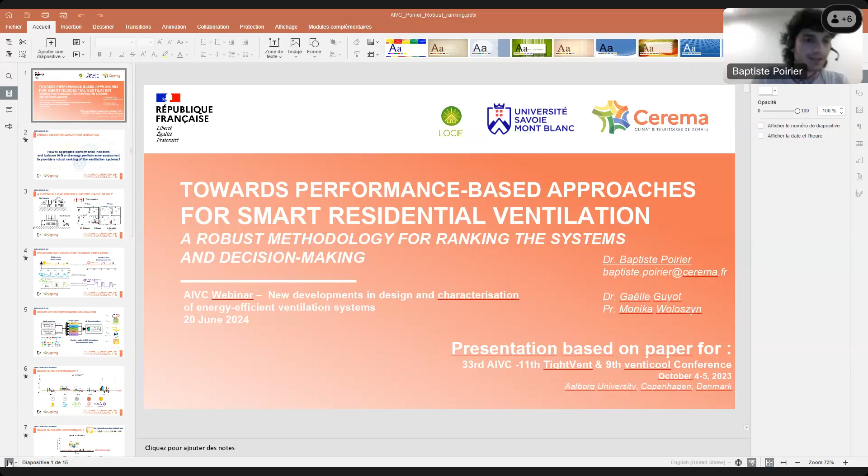So I'm Baptiste Poirier from Cerema in France, and I was a PhD student, and I did my PhD in LOCIE in Université Savoie-Mont-Blanc in Chambéry, and the work I will present today is based on a paper I presented at the last AIVC conference and also on my PhD work. We had a performance-based approach for smart ventilation, and today I will focus on ranking and methods for ranking the performance of the systems.

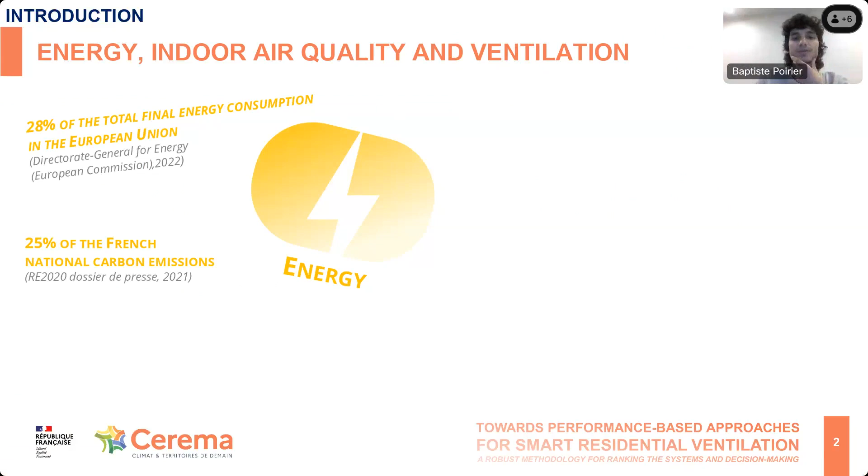A little bit of context on energy, building and ventilation. The building sector is part of total energy consumption in Europe, and in the French context it is part of carbon emissions. On the other side, ventilation and indoor air quality in buildings is important, as we spend between 60 to 90% of our time in buildings, and it has a cost for health because of bad indoor air quality.

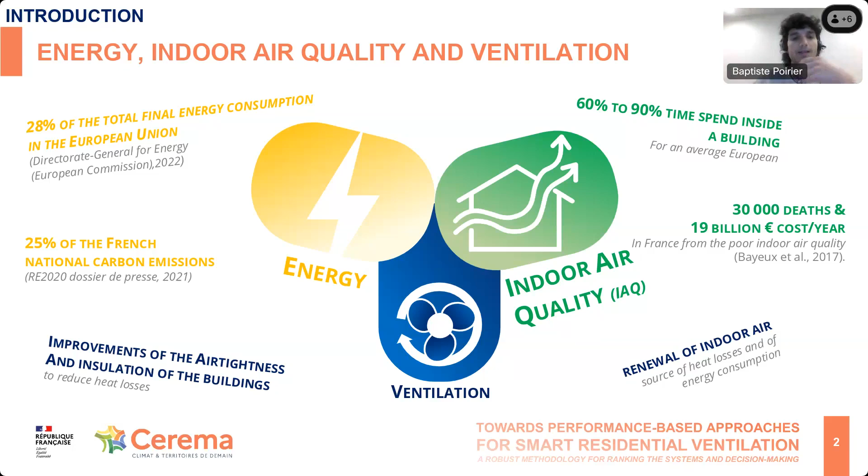So ventilation is at the cross section of energy and IAQ aspects in buildings, but today with reducing heat loss and increasing airtightness of buildings, there is a need for air renewal, and that raises the question how to keep good indoor air quality without increasing the amount of energy lost due to ventilation. And the question today was how to aggregate performance indicators and balance IAQ and energy performance for assessment, and to provide a robust ranking of ventilation systems.

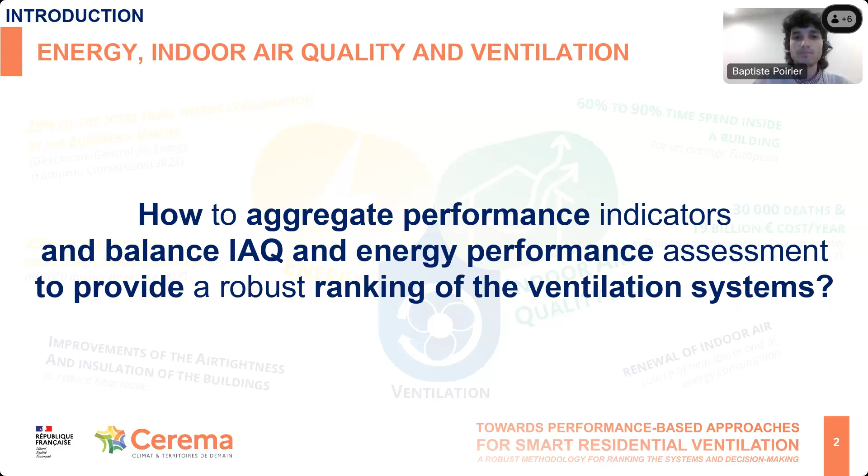So for this study, we performed simulations on a French low energy housing case study. It's a 2-floor housing with 5 occupants, so 2 occupants in the master bedroom and 1 occupant in each other bedroom. We modeled a balanced ventilation system and an exhaust only ventilation system, with exhaust in kitchen and bathroom, and supply in the living room and bedrooms when it's balanced, and air inlets at the windows when it's exhaust only.

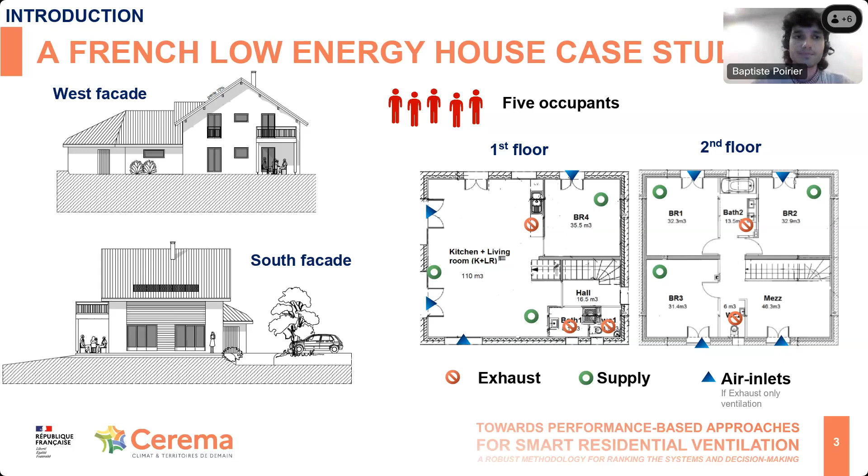Then we modeled 5 ventilation systems from constant to smart ventilation. The reference system is the constant ventilation system with an exhaust cooking boost during cooking events at lunchtime and dinner, both exhaust only and balanced with heat recovery. Then a second system is an exhaust only ventilation system with humidity control in bathroom and kitchen. There is a range of control depending on the relative humidity level, and when humidity increases during a shower or cooking event, for example, there is a higher airflow, and the cooking boost is also kept with this strategy.

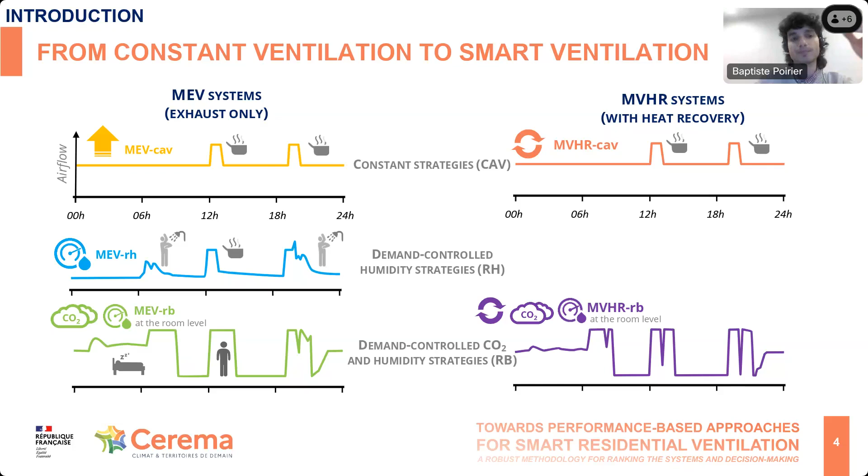And lastly, we modeled a more smart and advanced ventilation control strategy based on humidity and CO2 level, with control at the room level. That means depending on the CO2 level in the bedrooms and living room, and the humidity level in other rooms, an exhaust airflow demand is calculated and then applied on the exhaust airflow. For example, we can see here that during the night, when people are sleeping, there is CO2 accumulation in bedrooms, and we have higher airflow. During the day, when nobody is in the building, there is low airflow, and we also keep the high airflow during cooking events.

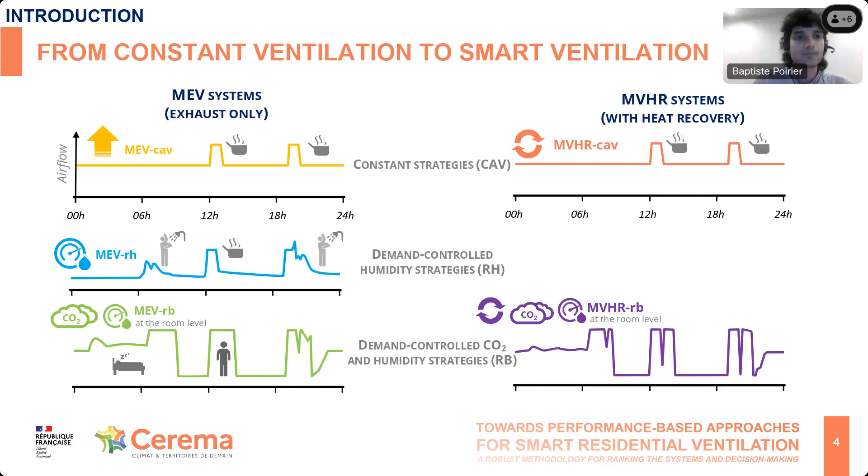So the approach was to perform design option calculations. We made simulations for sensitivity analysis, with low, reference and high emission scenarios for CO2, formaldehyde, PM2.5, and humidity. We also changed the range of variation of the total exhaust airflow, with lower or higher airflow. We performed a total of 500 simulations for each ventilation system design, which made a total of 2,500 simulations, and we performed airflow simulation with CONTAM.

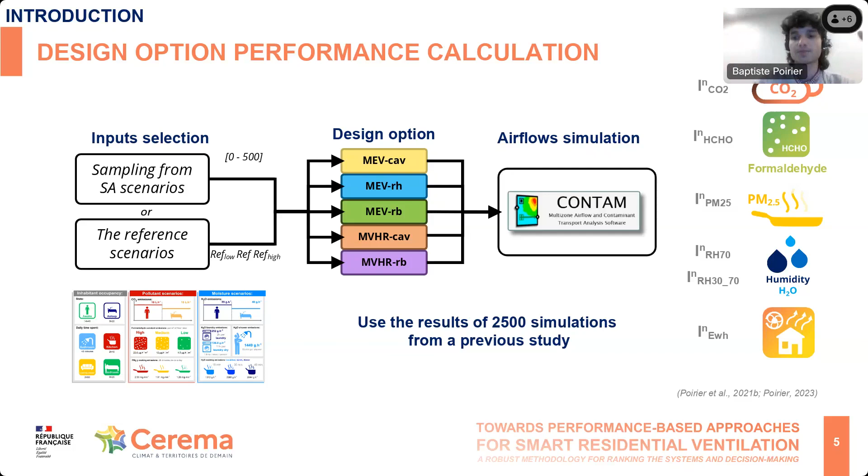With these simulations, we calculate 5 indoor air quality performance indicators and 1 energy indicator, based on CO2, formaldehyde, PM2.5, and humidity for air quality. We calculate the total exposure of the occupants for formaldehyde and PM2.5, and CO2 exposure over 1000 ppm. For humidity, we had two types of indicator: the time spent over 70% relative humidity, and the time spent by the occupants outside the range of 30 to 70% humidity. One is more for mold growth risk, and the other more for comfort and health aspects, and then the energy one.

It's a bit hard to rank the systems, but we can see that the room-based system with heat recovery is most of the time lower than the other systems in results. So we can say it's the first system for this IAQ aspect. Then we have the green system, which is also room-based with exhaust only, and is most of the time lower than the others.

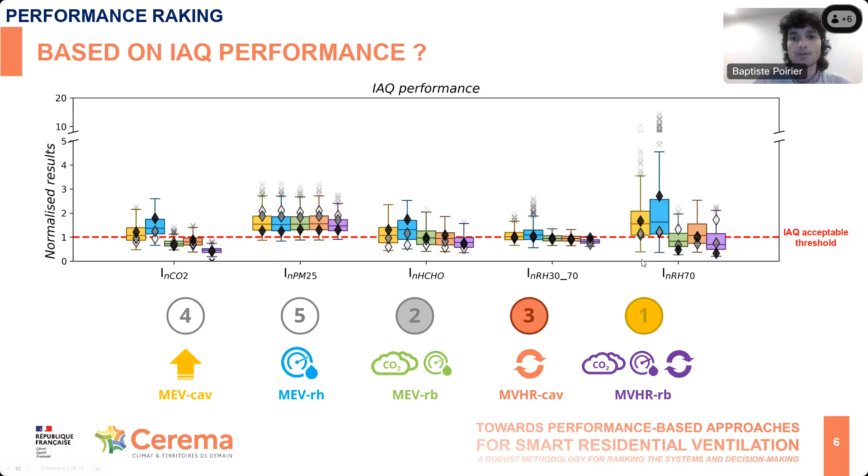Now we also calculate, as we have only airflow simulation and we don't have energy simulation, a really simple energy performance indicator, which is based on the heat loss from exhaust airflow. It's the volume of exhaust airflow multiplied by the heat coefficient and the delta temperature from outside to inside, which gives you an idea of the amount of heat lost from the airflow renewal.

And we apply an 80% heat recovery efficiency coefficient for the two heat recovery systems. So that's why these two are really lower than the exhaust only ventilation systems. But we can see that the humidity control system has a better performance regarding energy than the constant exhaust and the smart room-based. So because of the heat recovery, the two heat recovery systems are first in the ranking. And then we can give a ranking.

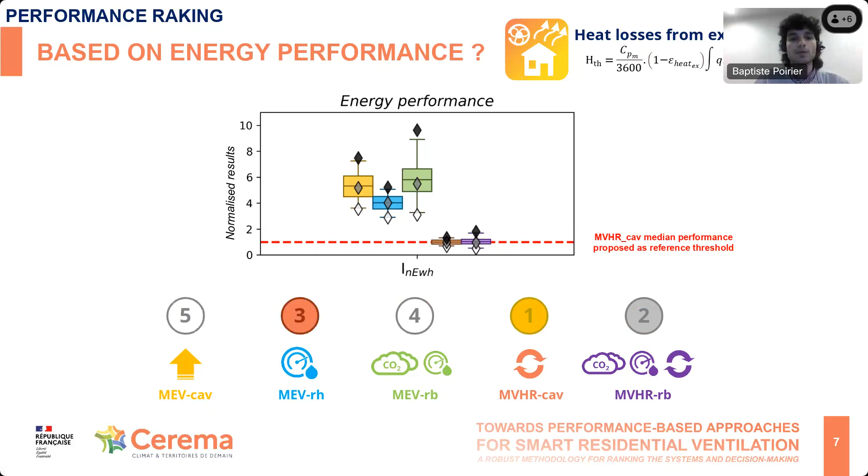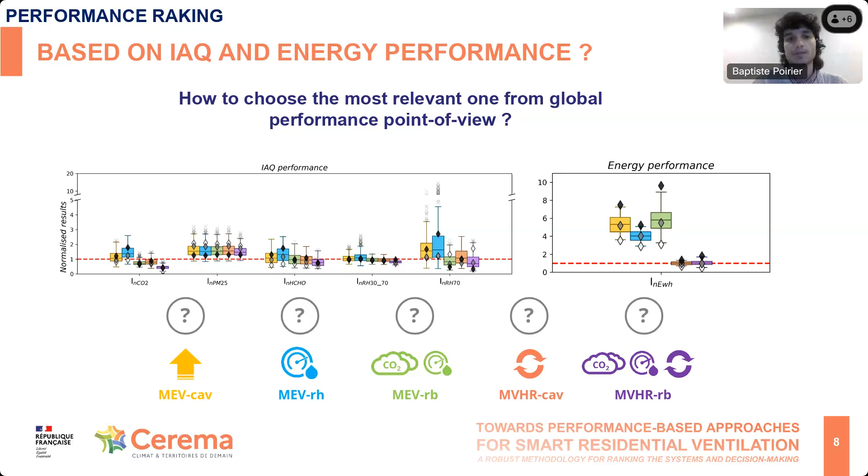But now the question was how to choose the most relevant from a global performance overview, because between the IAQ performance aspect and the energy performance aspect, it's a bit more tricky. So to answer that, we propose a ranking method to aggregate the performance in a simplified approach in three key steps.

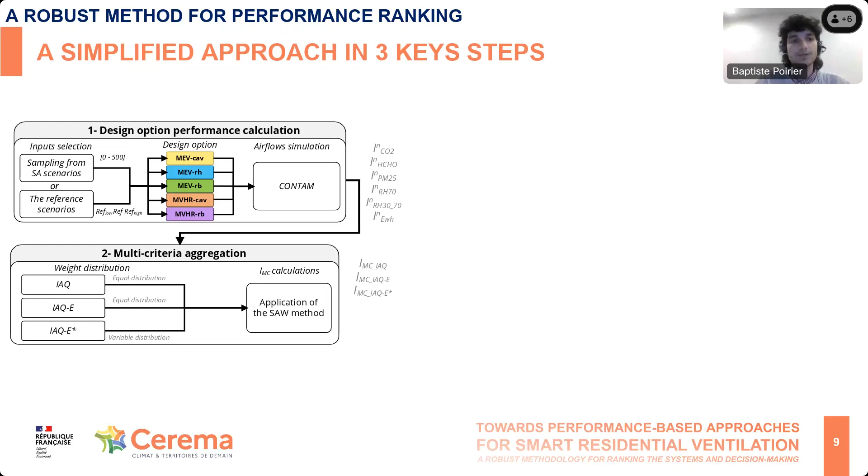The first step is the design option performance, so I presented you the result. Then we propose, for each simulation, to aggregate the IAQ and the energy aspect with a simple additive weight method I will present you, and then to integrate all the indicators from all the simulations, we propose a robust calculation and ranking method to calculate one design score for each system and to help with decision making.

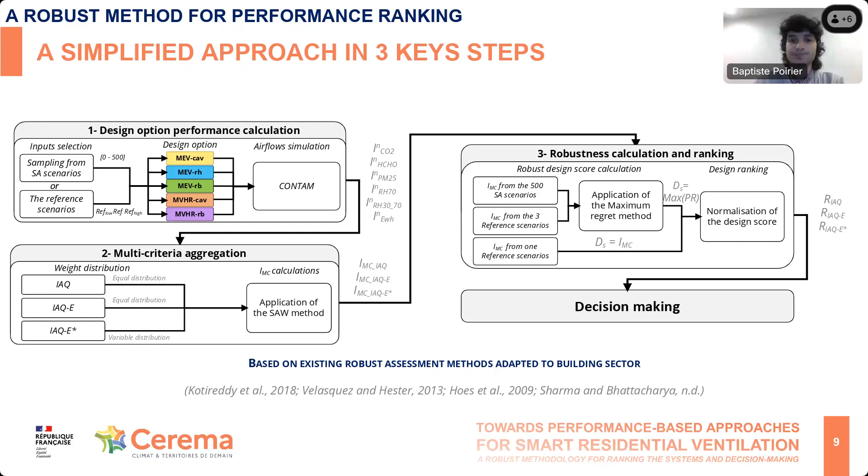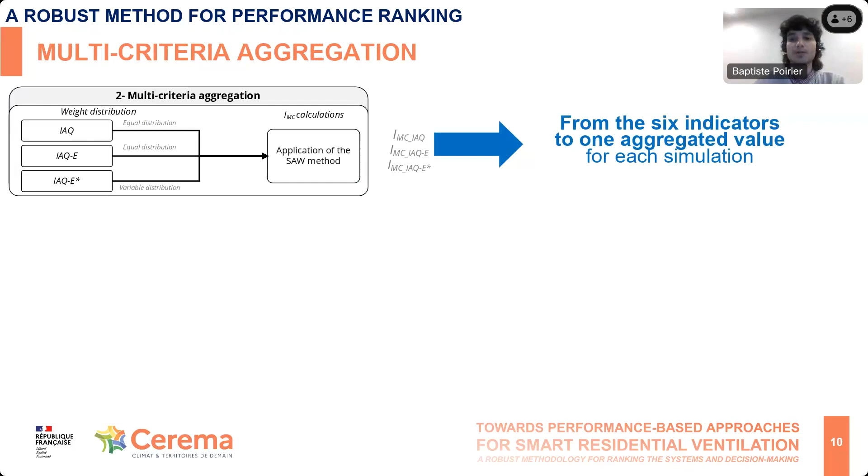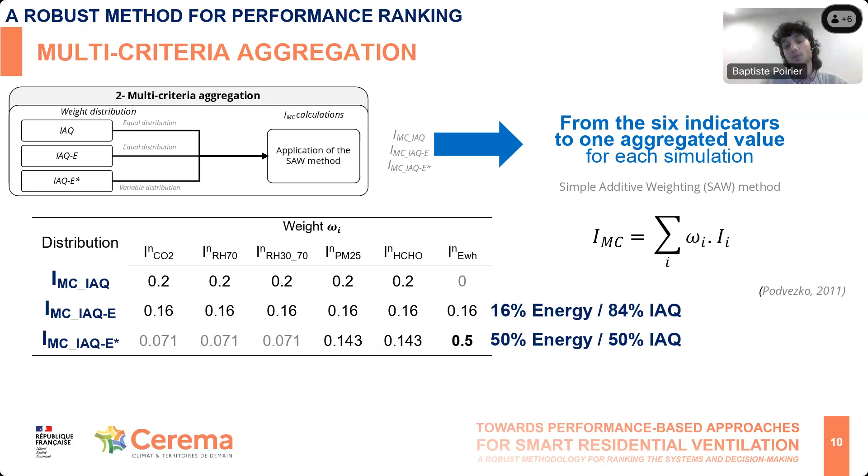So the second step is to aggregate the IAQ and energy indicators, to go from 6 indicators to one aggregated value for each simulation. We try three distributions of weighting. The first one is IAQ only. That means the energy aspect has 0 weight and doesn't count in the total aggregated indicator. And then evenly distributed weighting, so all the indicators have the same weight. That means energy represents only 16% of the weight, and there is 84% weight for the IAQ aspect. And then we propose IAQ-E, another distribution which is more balanced, with 50% of weight in energy and 50% of weight in IAQ.

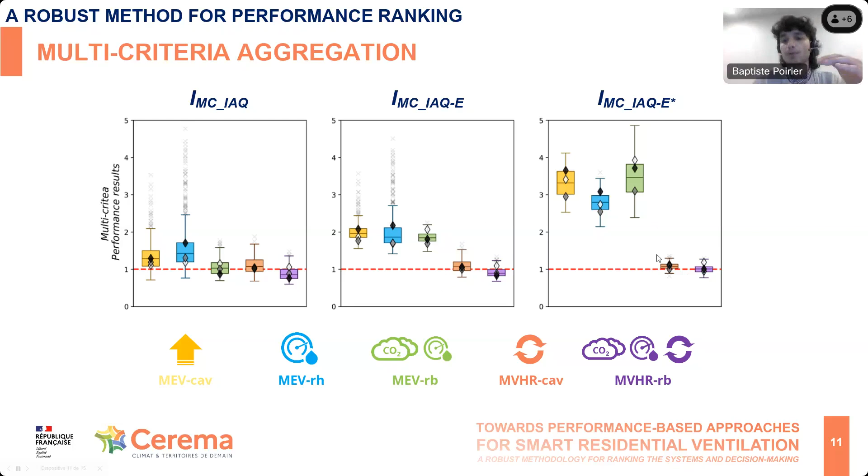So here is the box plot of the aggregated indicator. So it's only one indicator for the 500 simulations. Regarding the IAQ aspect only, we observe almost the same ranking as we observed previously. And when we start to integrate the energy performance, the two heat recovery systems start to be lower as they have better energy performance than the three exhaust only systems. So the comparison should be between heat recovery or between exhaust only. And lastly, if we give even more weight to energy, the gap between heat recovery and non-heat recovery systems is higher.

And then we try to integrate the result of all the simulations in only one score, the design score. And we propose to use the min-max regret method. In the paper and in my PhD, we tested 5 different methods, and we kept this one because it was one of the most conservative approaches to keep the result balanced between systems, because other aggregation methods sometimes artificially increase the gap between the results.

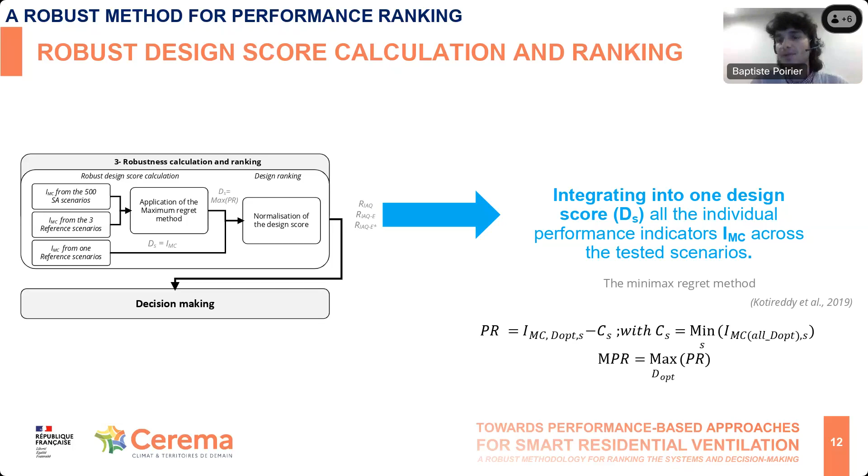So now I propose to only focus on the design score result with the two IAQ energy aggregations. If we give the same weight to all the indicators, we have a final ranking, but the room-based heat recovery system is always first. Then the constant airflow with heat recovery is also always second because of the good heat recovery performance.

But there is a change between the relative humidity control and room-based system with constant airflow, depending on which weight we give to the energy aspect. And indeed, for the room-based system with exhaust only, there is on average higher airflow that increases the energy loss, and on average for the design score that gives worse performance than the relative humidity control system.

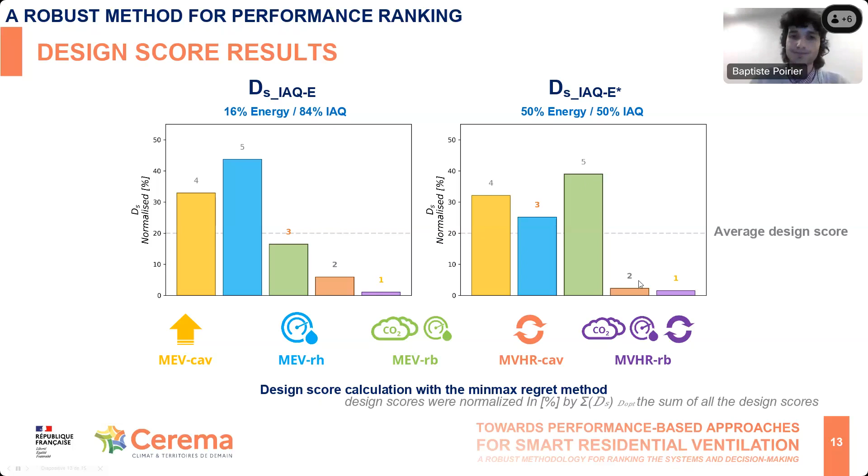So to conclude, the learning of this study is that with IAQ-E distribution, we can have a conservative approach where IAQ could be the priority in the decision making process. And if we increase the weight of the energy aspect for decision making, there is an equal proportion between IAQ and energy. And this study highlights that the design score could help to highlight the difference between several ventilation systems and strategies, to help rank them, including the uncertainty of several simulation aspects.

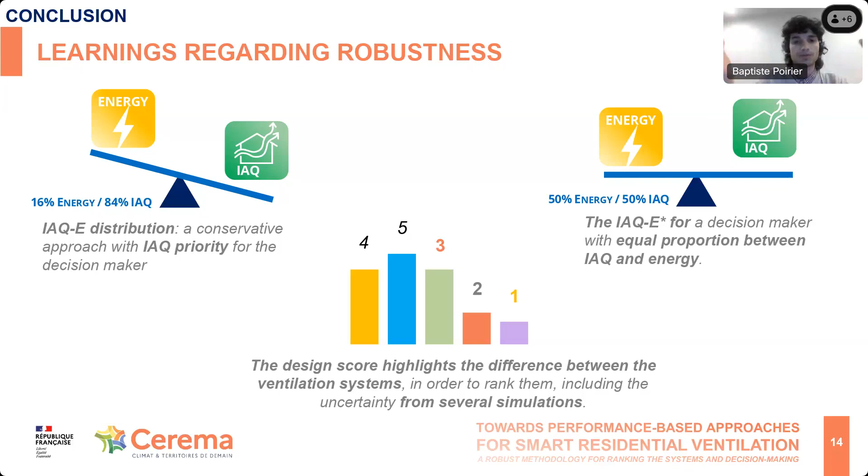So with this work there are a lot of perspectives on this aspect, and the question of how to weight energy and IAQ in such a performance-based approach, and to rank the performance of ventilation systems.